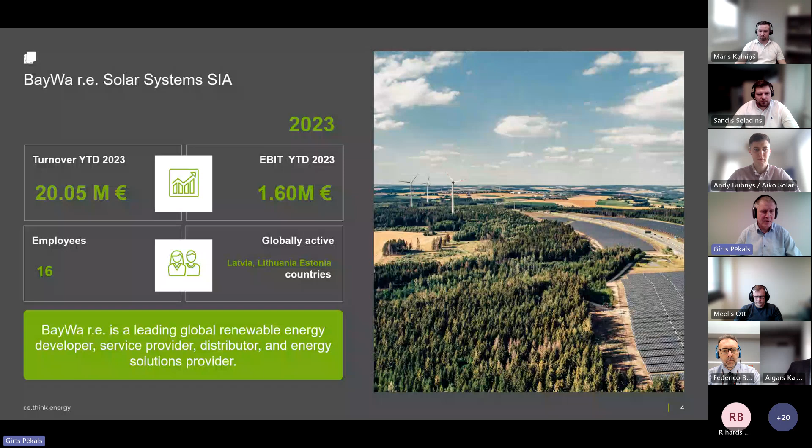We operate in 16... 3 countries. Picture from our warehouse in Riga. We're putting up shelves, 14-meter shelves, putting panels in, inverters in. Our aim is to be a relevant distributor in the Baltics, be number 1 in Latvia, Lithuania, Estonia, and reach 100 million turnover in 4 years.

Expansion - this is our web shop. The web shop has more aggressive prices. Please use the web shop, its prices are better than calling and asking our price managers. We will redesign it a little bit; at the moment it looks like this.

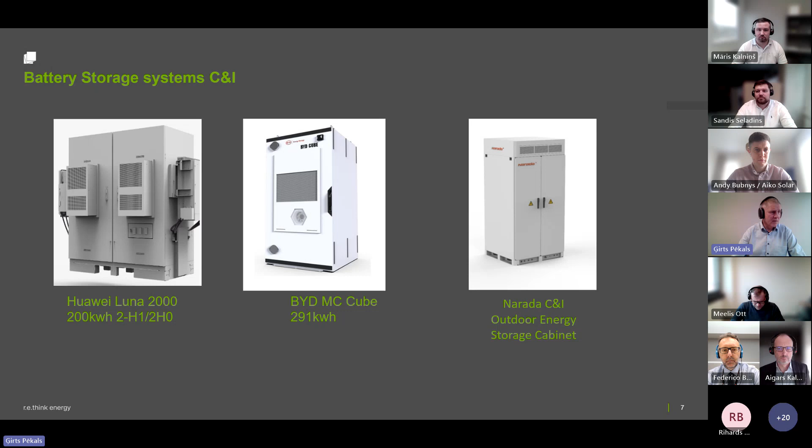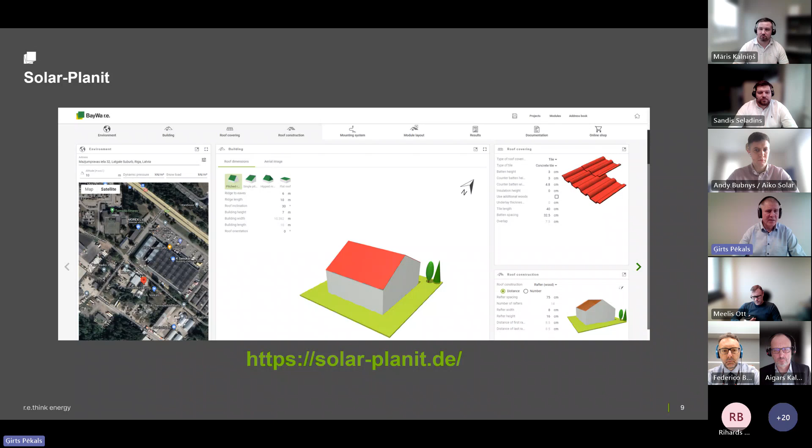We are eager in the C&I battery business now. We have 2 people, and we are also eager to take part in utility scale business, big ones with different suppliers. In BayWa we have Solar-Planit, which you are also welcome to use to make calculations.

And this is our structure. Baiba Kraule is chief accountant. Domantas, who is in Kaunas, is the COO, helping with all business. Also under his control is Olex.

But we changed the structure a little bit from this year. Sandis is a sales manager, or we can say head of sales for the Baltics, and all sales staff is under his control. Then Kaspars is team leader of the battery business, and Aigars Kalniņš is BESS engineer. Maris Kalniņš is the Novotegra expert. Evelīne is our purchasing lady, and Sergejs Vaginovs is our chief of warehouse and logistics.

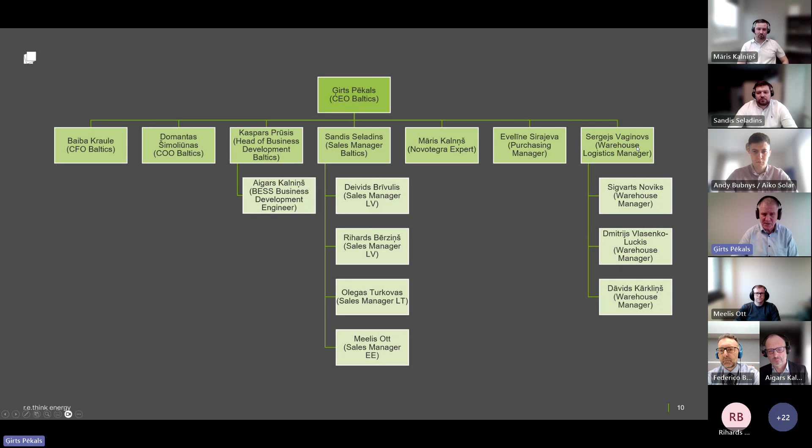This is our company information. Please remember B2B shop, solarshop.baywa-re.lv. That's from my side, that's all.

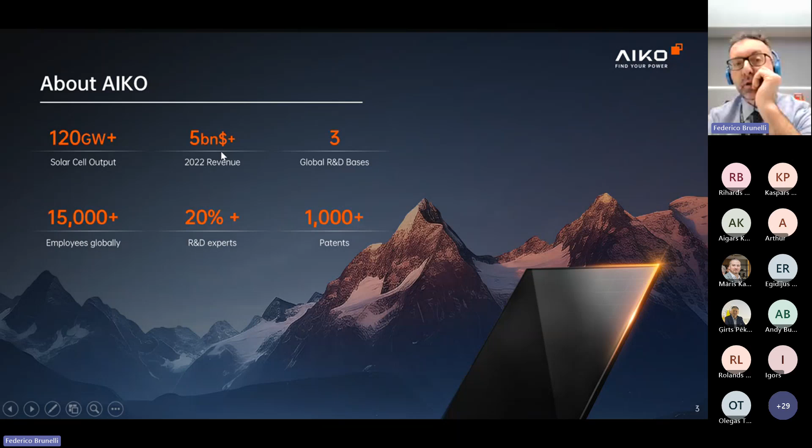Considering production capacity, we have 61 gigawatts, and we are growing because 25 gigawatts are for PV modules with ABC. ABC is the all back contact technology, which is going to be the topic of this presentation.

Here is the path that brought us to today. The company was founded in 2009, and as you can see, we have many steps that we introduced into the industry. We invented tubular PERC technology in 2016. We also defined the metrology for bifacial cells, which is technologically very important and part of the standard we are using in the industry today, seen in the products you sell to your customers every day.

In 2020, we were the first company to introduce mass production of 210 millimeter cells. So as you see, we are really on the edge. We are very good at closing the gap between R&D and mass production, and this is very important for the market - how fast you can introduce the technology, and how fast you can help the market grow.

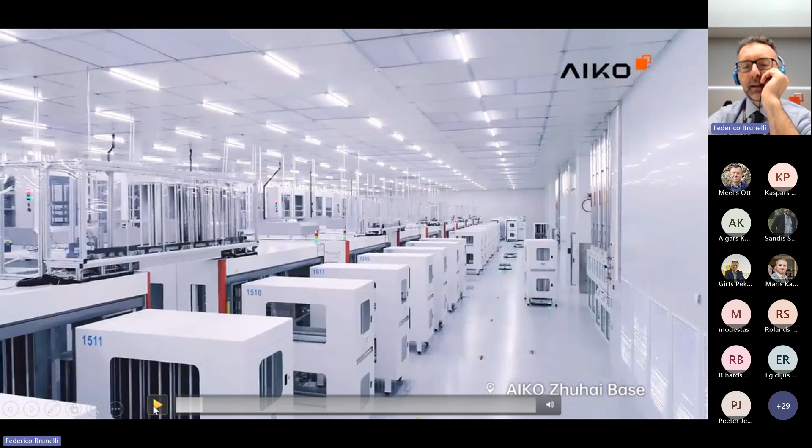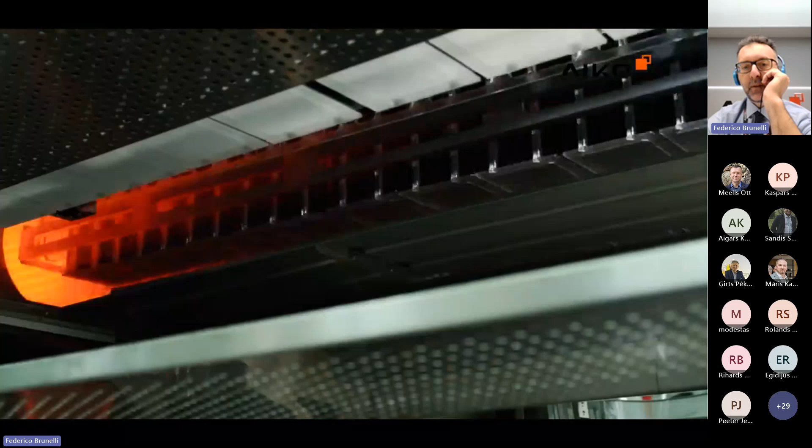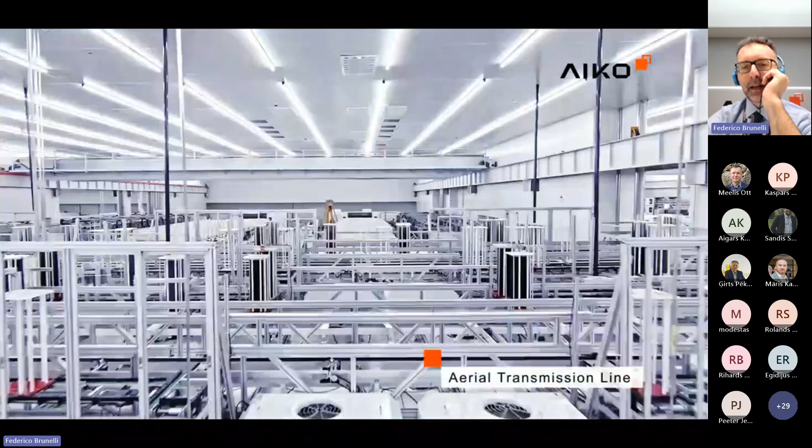Let me start the video again, and in the meantime I can talk. You see here is the factory. We have one factory for ABC modules where we manufacture both the cells, PV cells, and PV modules. This is the most advanced factory in the world, so if you are going to travel to China, please arrange an appointment to visit our factory.

The back contact technology is not a new concept in the industry, we know it well, but our back contact solution is really incredible. There are many new features of the product, high performance, and we are introducing step by step many new features that really change the way people design a PV system, and can estimate the profitability of the PV system. Let's introduce the scenario.

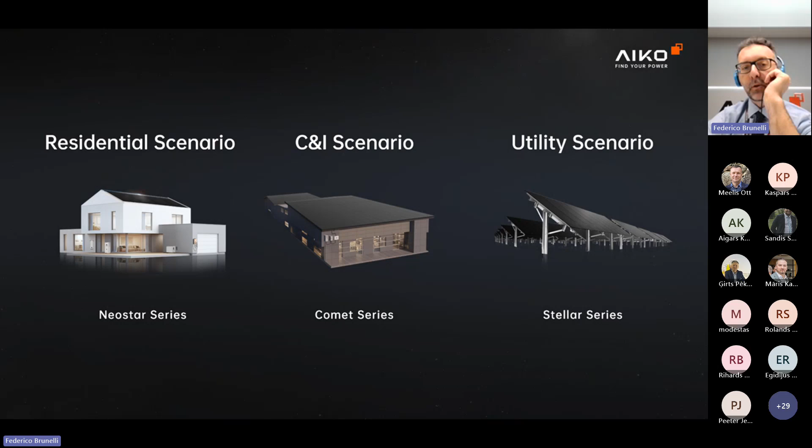We have PV modules designed for residential, C&I, and utility. In residential we talk about 54 cells, and for C&I and utility, 72 cells. Here you see our range. Recently, in just a few months, we have the new name of the series, but to help you memorize this short portfolio, remember that all our PV modules come with ABC N-type back contact cells. We have 54 cells for residential, and 72 for C&I and utility.

For residential, we have the full black and the white module. The full black can be with dual glass or with backsheet, and the white module can come with the black frame or aluminum frame. From our side, the full black, which also from the aesthetical point of view is the best one in the market, is for sure the best product to offer your customer, to identify your proposal as very high level, the highest level you can share.

On the other hand, you can see that the efficiency of the module, the nominal power, is really huge. For residential, nowadays we can offer something like 460, and in the very near future more - we are currently producing between 455 and 465. So in a very short time we can achieve 470. For C&I, we can offer 625 for dual glass, and 630 for backsheet.

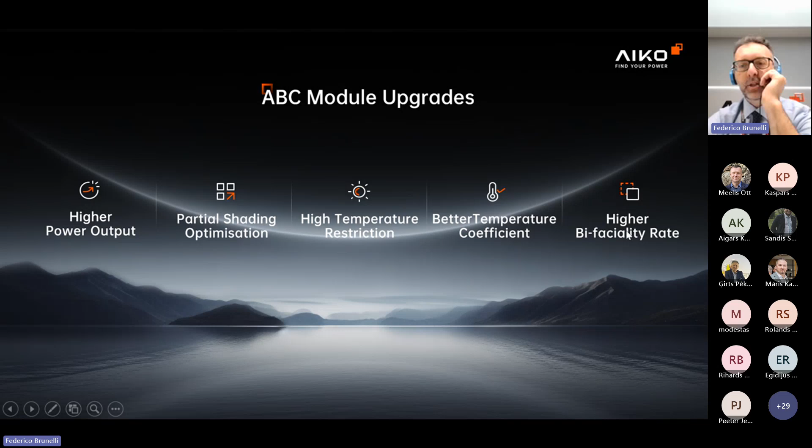Considering the features of the product, here we see our latest features. We have a higher power output, which can also be described as higher efficiency. Partial shading optimization is a new system available from generation 2 ABC cells that we will see, and also high temperature restriction, which is strictly related to partial shading. The better temperature coefficient is valid for every PV module available, also the ones you have in your warehouse right now, and bifaciality for utility, as I already mentioned.

Let's see here the high power.

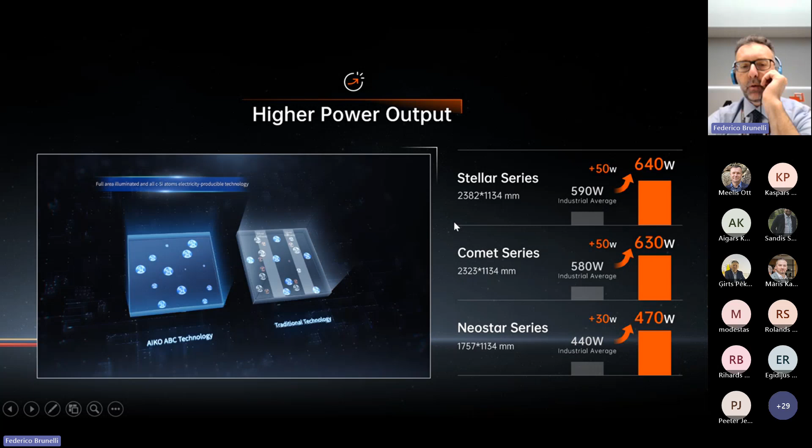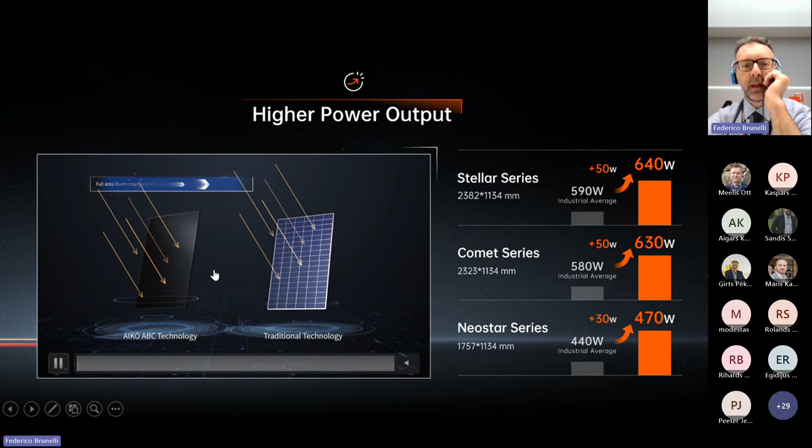The topic is easy to see: as we have all the contact on the back side, the front of the PV cells is completely free from busbar, so there is more area available.

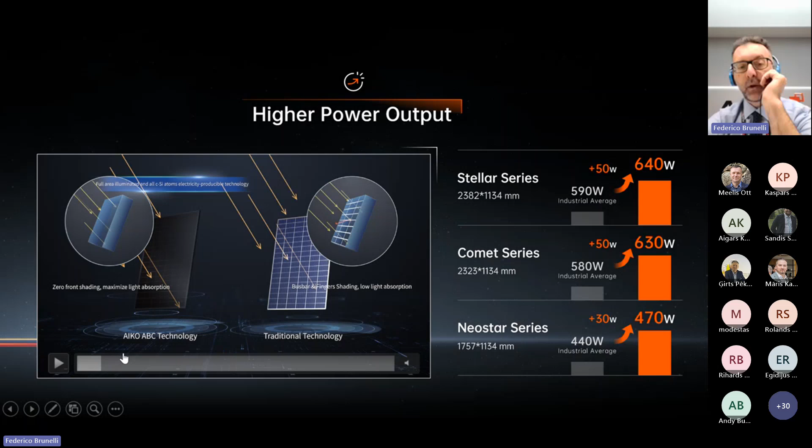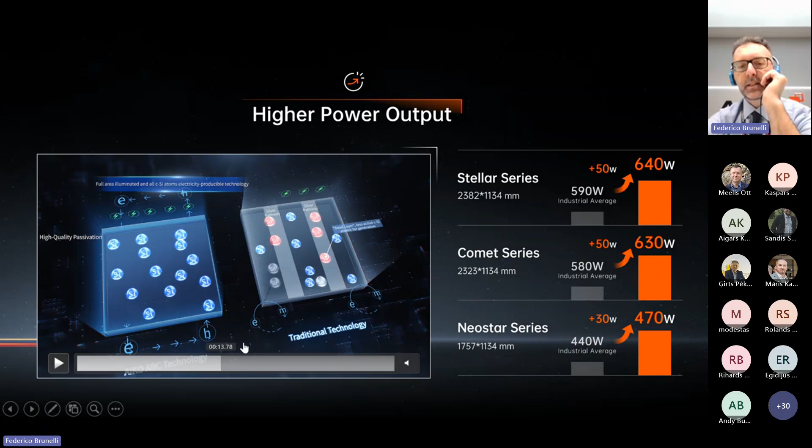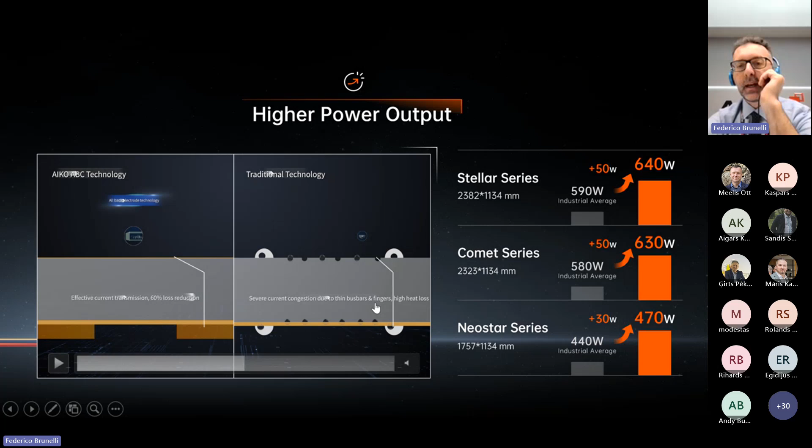We can also use a better connection to make the PV cells more efficient. We have less interface area between busbar and the rest of the cell. The construction of the PV cell, as we see here, has no busbar on the front. All connections are on the rear, giving us a 60% loss reduction for current transmission, making it more effective. The combination of these technical aspects, plus front passivation, brings us more power.

If we look at the residential PV modules, 175 by 113, pretty compact, we have on average 30 watt peak more than industrial products, the average in the industry.

For the 72 cell version used for C&I, it's 50, and also 50 for utility. You see the 72 cell comes with a little difference in height. This is why we have the M10 PV cell at 182 by 182 for residential and C&I, but 182 by 192 for the utility scale product.

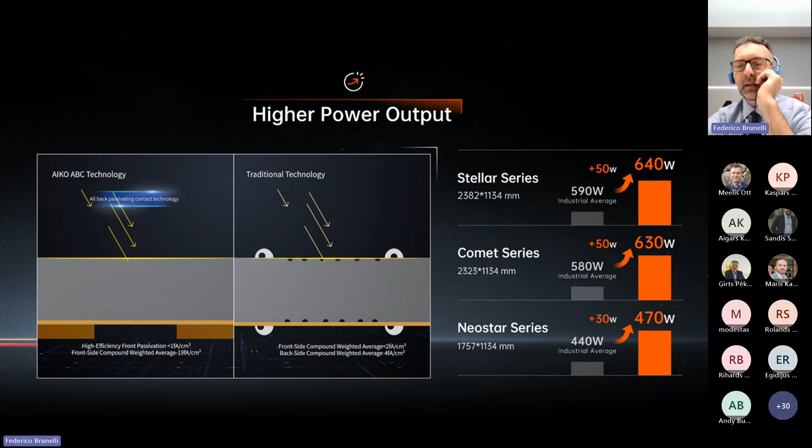You see here that 238 by 113 is basically the gold standard for utility. Most PV module manufacturers are now selling and offering this kind of size, in order to have a standard in the industry, facilitating designers and installers to design projects.

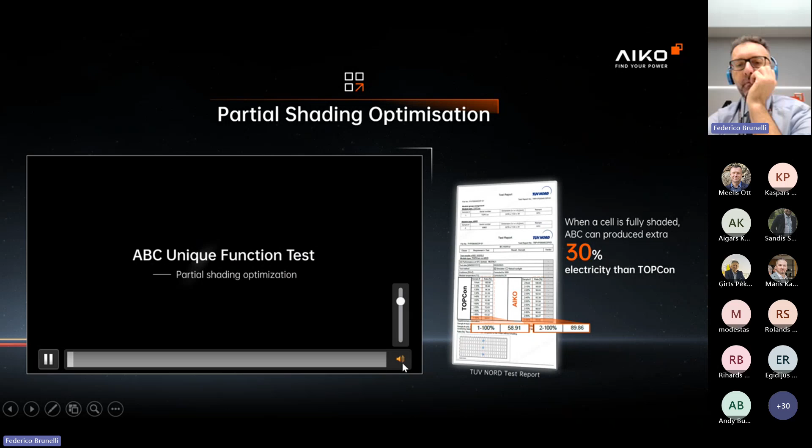This is a very interesting feature that is going to change the approach for designers, and it's available for Generation 2 PV modules with ABC Generation 2 cells. The setup of this experiment is very easy: on the left side we have ABC AIKO modules, on the right side the traditional modules. Each module is connected to a water pump, and here we see a little fountain.

Now, step by step, our colleagues are shading 2 PV cells. We choose the position of one cell on each string of the PV modules, and we see that the drop in voltage is very huge. When we shade 2 cells, the drop in voltage for traditional modules is already big, but very minimal for AIKO.

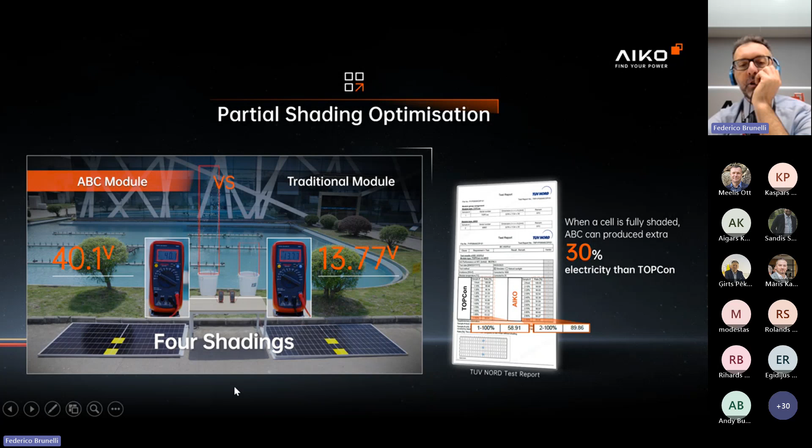Let's see with 4 cells. AIKO is still around 40, while the competitor is already down to 14. We see here that the fountain for the competitor is reduced a lot, and it's going to get even worse when we cover 6 cells.

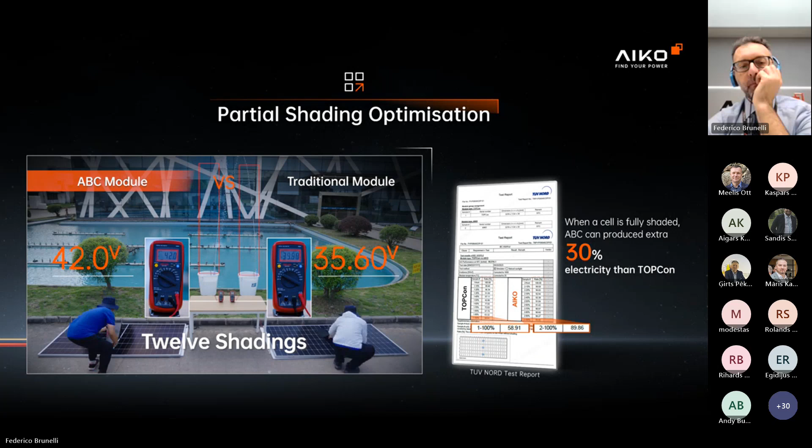You see here 0 voltage, so there is no power from this PV module, while AIKO is still an excellent 35. The last test is covering 12 cells — and here, AIKO is still something like 29 volts.

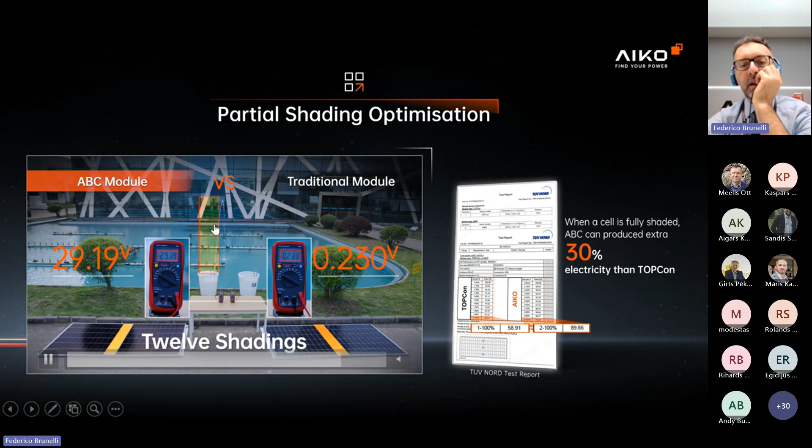So we still have the fountain that is working, and we are still generating. This provides you an understanding about this technology, and what you can expect is an average of 30% more productivity from AIKO PV modules in this situation. Let's stop here.

You see here that in this situation we are simulating when 2 PV cells are shaded, and we see here that in AIKO PV cells, due to the characteristics of the PV cells, what we lose is only the PV cells covered by the obstacles. In the traditional PV modules, we see that we are losing much more.

We see here that the bypass diode is going to be activated. So in AIKO, we lose only 2 cells in this case, and in traditional modules, we lose 1/3 of the PV module. This is due to the breakdown voltage of the PV cells. When the cell is covered, due to the low voltage breakdown value, we can say the cell is transparent to the circuit. So we are losing only the power of the PV cells or something more, but we are not activating the diode in our modules.

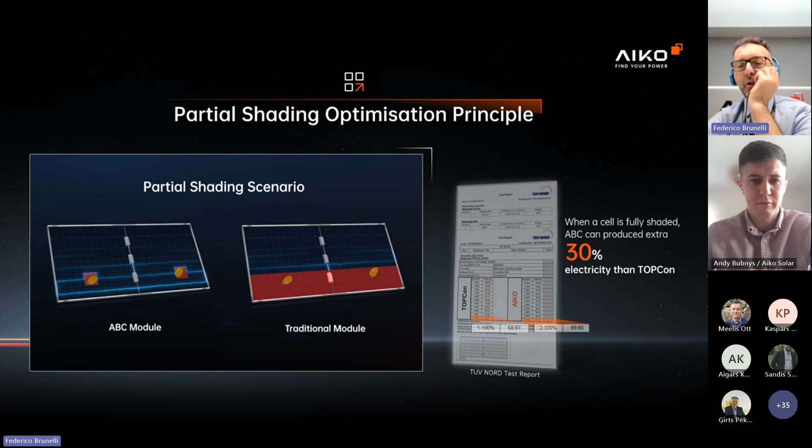Consider the orientative value of 30%. Obviously it depends on each situation - there are many different situations. We know we have an impact when the PV module is dirty or covered, and there are many situations. The advantage of AIKO PV modules can achieve also 60%, but we need to be more precise and discuss the specific situation. From my side, I think if we talk about 20-30% that's already a very big advantage. We don't need to always put ourselves in the cherry-picking situation when we show, for instance, up to 60%. 20-30% is really huge.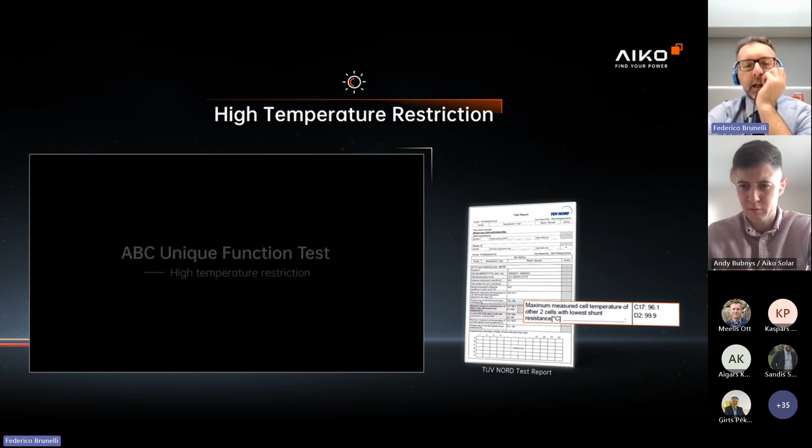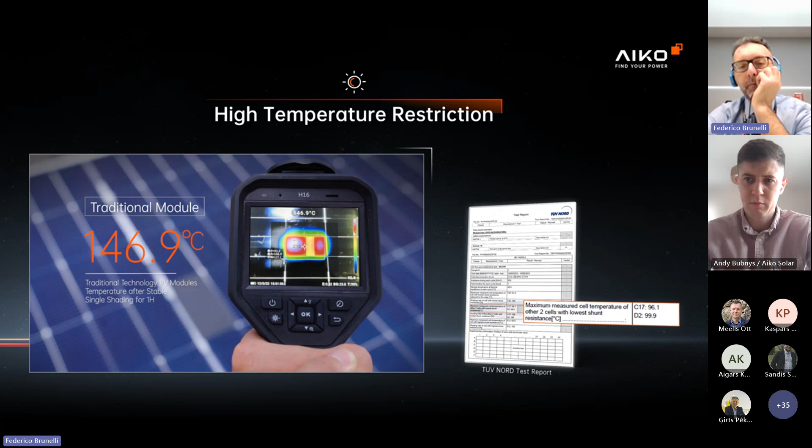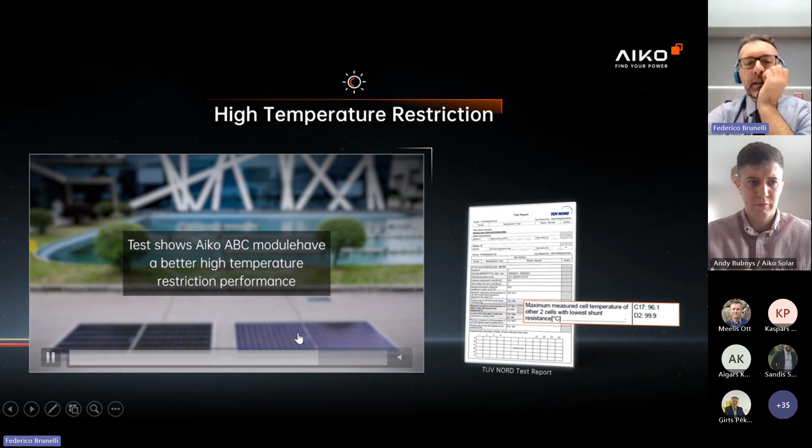High temperature restriction is information related to the PV cell temperature after 1 hour of shading, as we see here in this video. What we see is that the traditional TOPCon PV modules come to 147 degrees, and the AIKO PV cells come to achieve 100 degrees. This is very important for the durability of the modules, and also gives you more information about the quality of the cell. So the cell is really very effective.

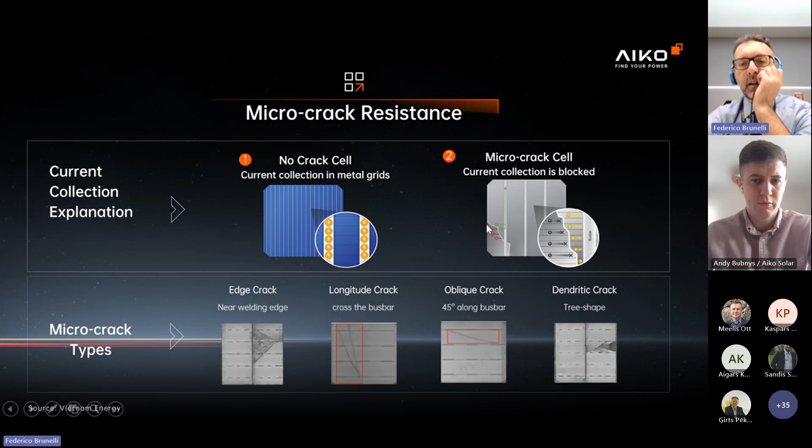Microcrack resistance is a topic that is valid for all the modules in AIKO. We have back contact cells where all the welding, all the contacts, are on the back. We see here how the micro crack looks in different situations, and the loss of energy due to the broken area in the cells. The great advantage of having developed back contact cells is that the welding is on a single side - we don't have the Z type as in traditional ones - so we were able to make very strong welding that makes substantially zero risk of micro cracks.

Again, to me it's very important to show that there is a big investment in the PV technology, a big commitment to provide a great product. We can see there are a lot of characteristics that bring great performance and also strengthness - they are very strong and reliable.

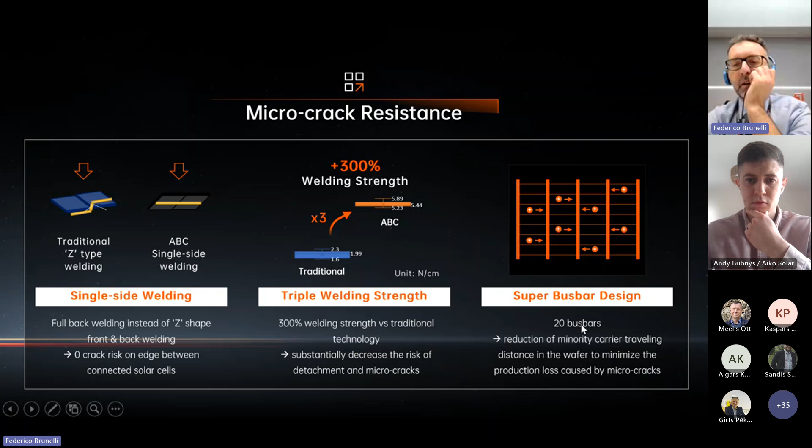The bus bar design is also designed to reduce the loss of energy. There's a characteristic called the carrier traveling distance, so using 20 bus bars on the back, it was possible to also make the cells more efficient from this point of view. Another important characteristic is the temperature coefficient.

When we talk about nominal power, we talk about the power that is tested at STC condition - meaning the temperature of the PV cells is just 25 degrees Celsius. When we have a higher temperature of the PV cells, we have a drop in module power. The temperature coefficient on the Pmax, the nominal power, is exactly this value - it describes the drop in power with respect to an increase of 1 Celsius degree. You can expect that in our area - I'm visiting Poland - we know we can easily have, in recent years, 30 degree temperatures.

And we see that at 30 degree temperature, we have a PV cell temperature of approximately 60 degrees. And due to the temperature coefficient, we have an advantage of 1.4% respect to TOPCon technology. So we start from a nominal power where we have, in average, 7% more power than TOPCon. And in summer, when we have just 30 degrees, we have another 1.4 points.

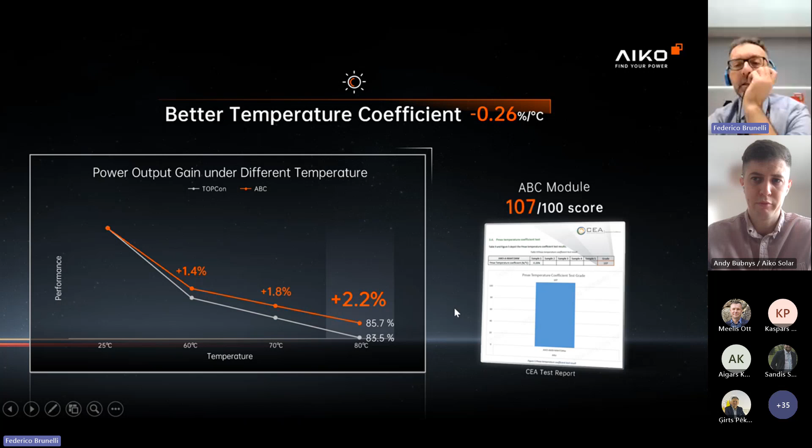Let me know in the next few days if you can make a calculation in this way, if you can really get the value of this temperature coefficient, because it's a very interesting selling point for us.

For utility modules, we have bifaciality rate up to 70%, and here we see the advantage in several scenarios: utility on ground, floating, which is now more and more worldwide, and on foundation. You can see here 4.7, 5.6, 5.3, so let's say in average 5, between 5 and 5.5.

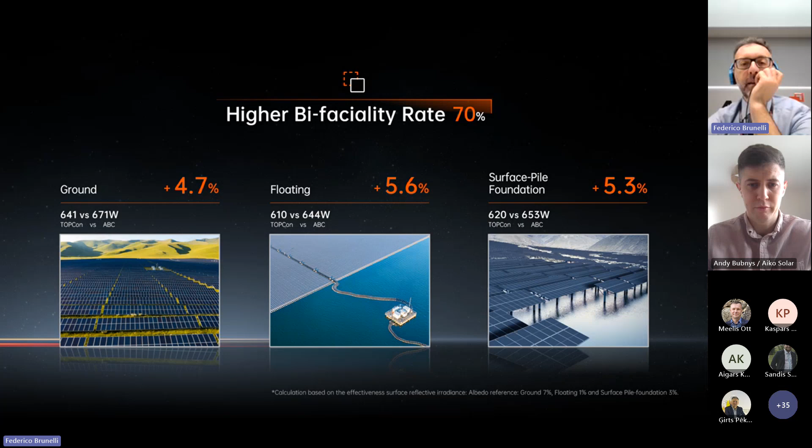So a huge advantage, also in productivity that we can go even further. We see that we have many advantages, and you can calculate for your project what is the advantage for the specific situation. But I think now it's pretty clear what are the advantages of AIKO.

If we discuss for residential, the higher power means in restricted areas we can install more power. The aesthetics is for sure very interesting for high demanding markets as in Europe. Everywhere in Europe there are high demanding customers, and aesthetics is part of the requirement, and obviously safety. We saw the low temperature, or the low hotspot temperature when the cell is covered.

For C&I and utility, we can discuss even more about financial aspects. So faster payback time, of course, but I would say lowest LCOE. In both cases, the investor can evaluate levelized cost of electricity, how much it costs per megawatt hour, so they can compare the value in the market and their value, and evaluate the benefit of the PV investment in the life cycle of the investment.

Now we are going to go into the scenario analysis for residential, C&I, and utility. So Andy, please let me know if there are any questions at this point.

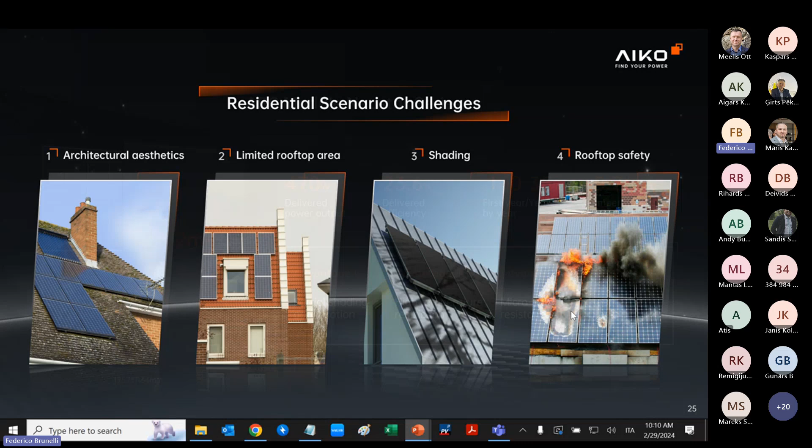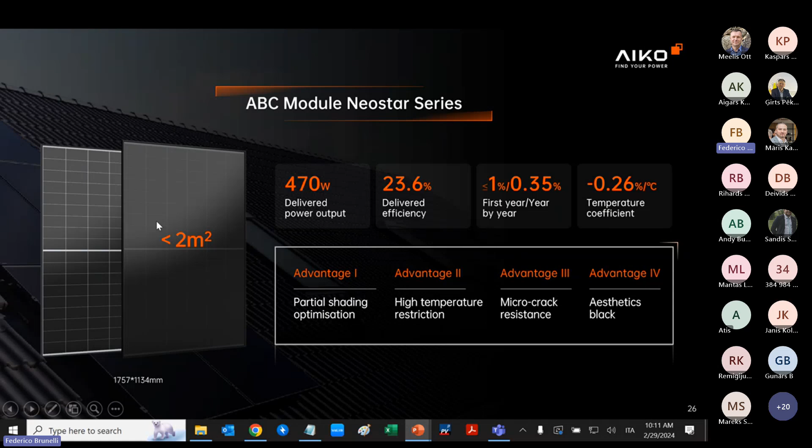A comment about aesthetics - also, if you have the white PV modules with the black frame, it is also very beautiful. And when it is installed on a pitched roof, the aesthetic is also good. Obviously, the highest level, the highest quality, comes with the full black.

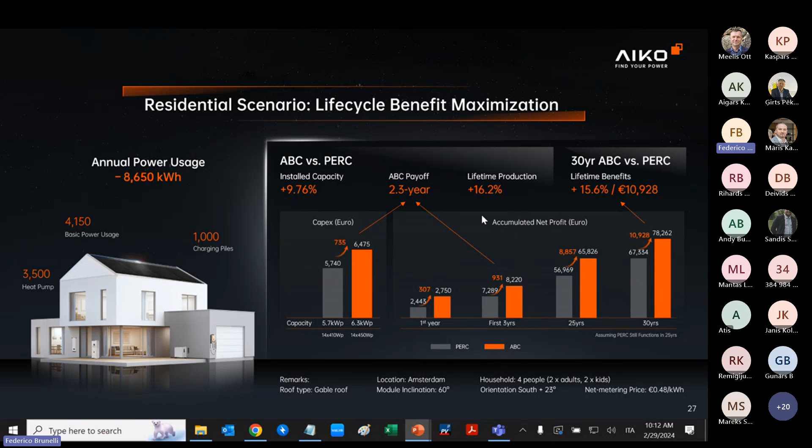Here you see a typical example of how we evaluate and compare our product with others. We have a residential installation in a typical situation - we try to show a typical example that can be shared across Europe, but we can also do it for your client based on your input. We see here a comparison with PERC, and we have approximately 10% more power installed. We have a capex that is of course higher, and obviously we sell value, so it's clear we can be more expensive. But we see here that we have a faster payback time, and if we see the accumulated net profit, it's going to generate 15% more cash flow. So the PV installation is an investment, and a successful investment in the long term.

And for C&I, in many cases it's similar because more and more our customers are demanding high power. They want to control BOS cost - BOS is all the devices requested for the installation except the PV modules. Also, rooftop C&I has problems with shading. And very important for C&I, operation and maintenance cost and difficulties. So let's see how we go with AIKO.

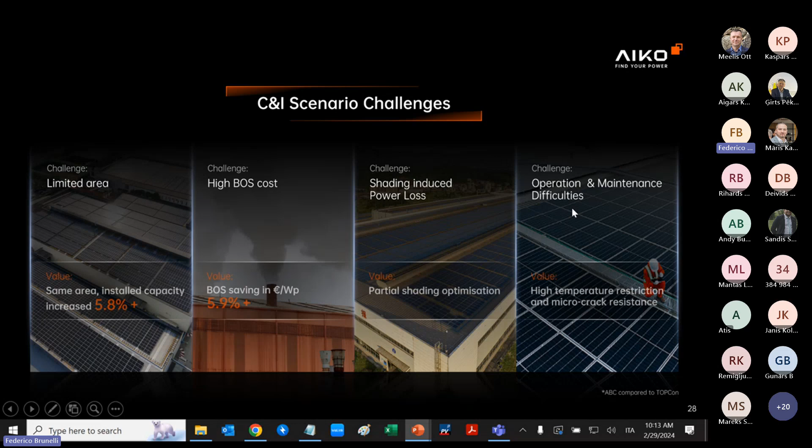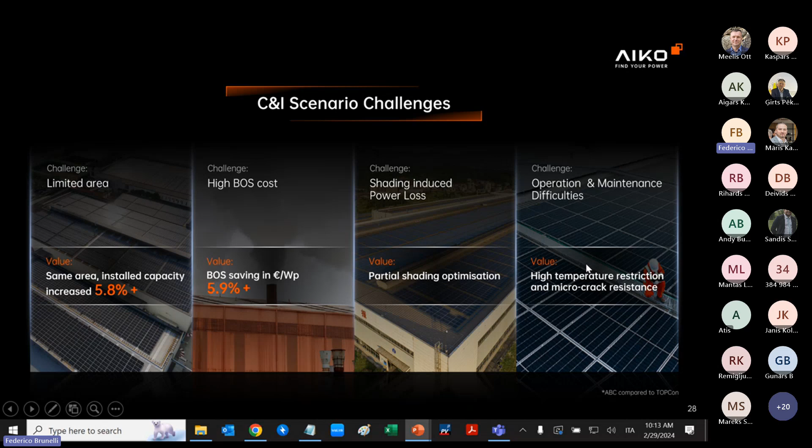Approximately 6% more power in the same area, 6% saving in BOS, partial shading for generation 2, but again, the characteristic of microcrack resistance and high temperature restriction.

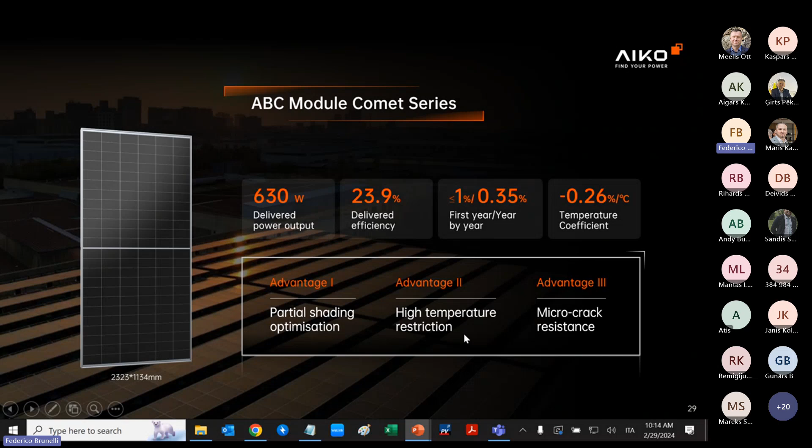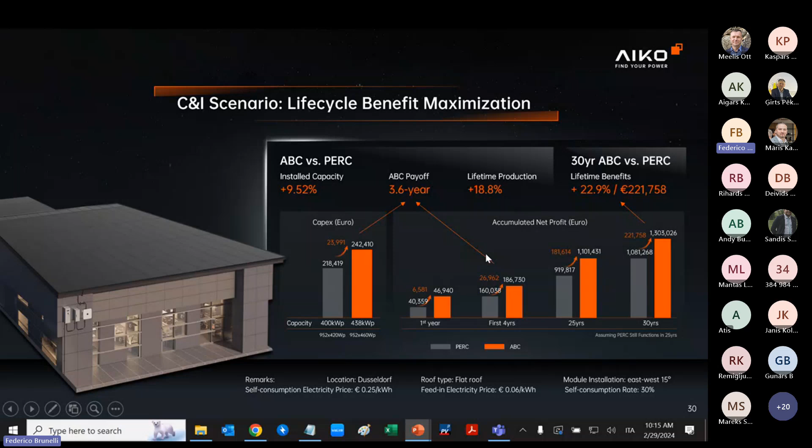I think that's a comment on the C&I. Very often customers want to save on the energy and electric energy bill, but also they want to control the price of the energy. So they know that installing, for instance, 440 kilowatt peak, they have a large amount of energy where the price is fixed, and they control this value. Very similar situation for utility.

Even more, we can discuss limited land, because nowadays in many areas there is limited land availability, and also land classification, restricted or protected areas. In many cases we have good grid connection capacity, but limited area. The same applies, obviously, reducing BOS cost, operation and maintenance, and also guaranteeing the performance and high performance in every situation.

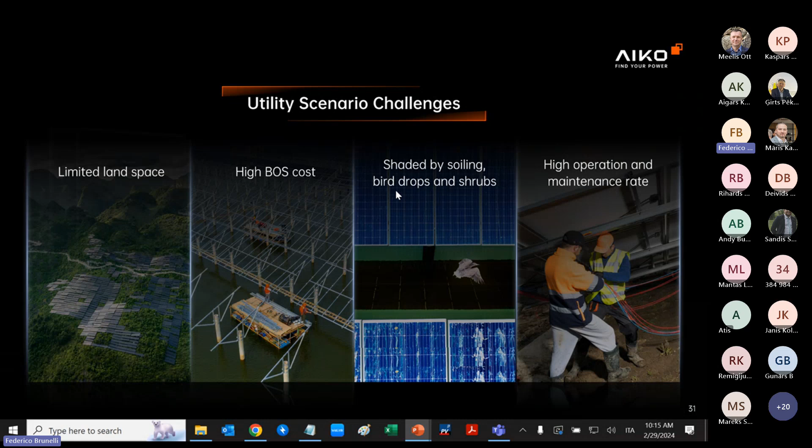We see here the PV modules for utility is 2.38 meters in height, and is 70% bifacial. Power on the front up to 640, 23.7% module efficiency, and the degradation as we discussed before.

For generation 2, the full package, let's say, of advantages. As I mentioned before, we have also an optional waterproof package where we have improved encapsulation, anti-corrosion frame, and this is important for installers, waterproof cap. So it's a full package of solutions that help the product to be more resistant longer and also avoid problems during operation.

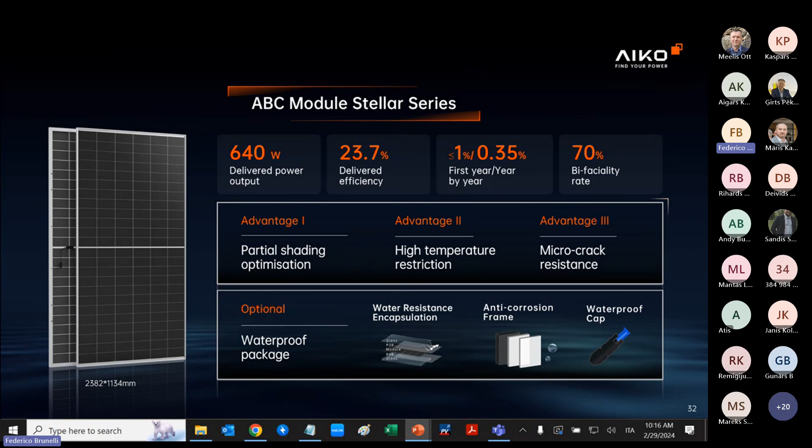And for the LCOE, in the same area, we see here also values that are huge, because 4% in some areas can be even less, but let's say that usually we run between 3.5 and 4% advantage, and these are very big numbers.

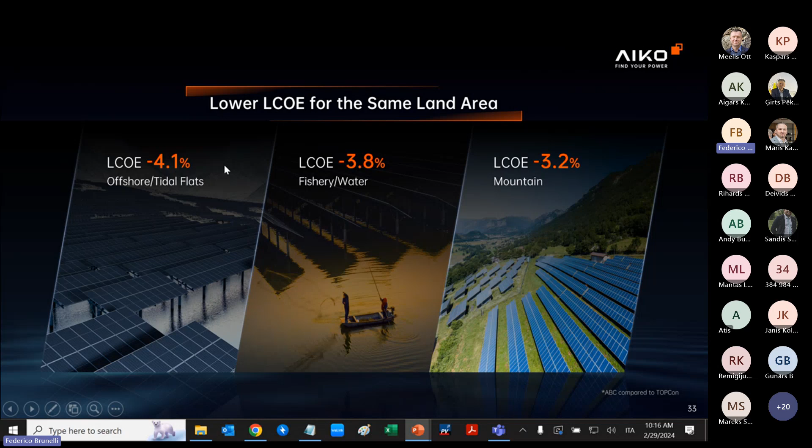Let's say that I can turn on my camera now, and I can also show this one. It's the sticker with the 35 millimeters hail. Let's say that also, yeah, we have a positive testing report with 35 millimeters.

Obviously, it depends how large the hail is. Also in northern Italy, we had many events in recent years where the hail was as big as an orange, and in many areas the roofs were devastated, so even the tiles of the roof were broken. Nowadays we can say that the technology, for instance of the front glass, is improving. Also, having ABC cells helps because of microcrack resistance and better behavior under mechanical stress. But guys, remember that when the hail is something like an orange or a rugby ball, it's very difficult for the PV module to resist.

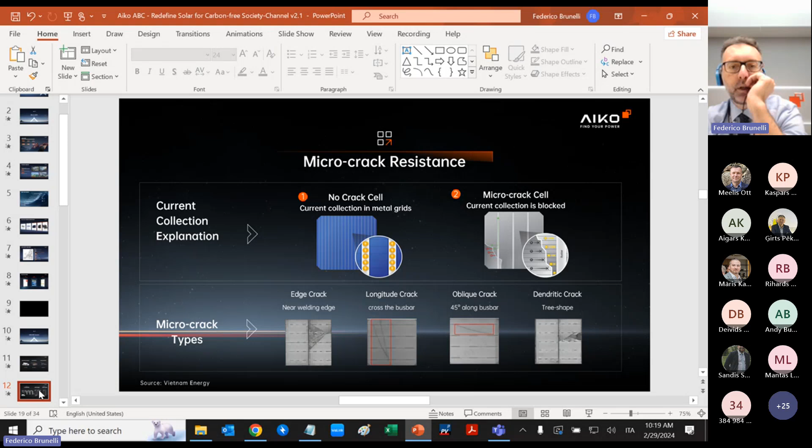Not in this way. It will be easier, faster to go here. Portfolio. In the portfolio here.